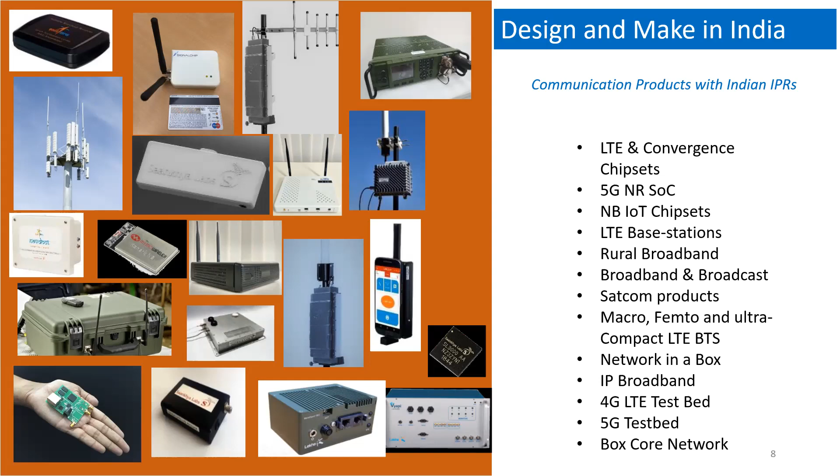These are the Indian IPRs that have already been done in India, like LTE convergence chipset, 5G NR SoC, then NB-IoT chipsets, LTE base stations, rural broadband, broadband and broadcast, SATCOM products, macro femto and ultra compact LTE BTS, network in a box, IP broadband. Our point is whether it is built in Bhubaneswar or in tier 2 cities, and how we are connecting with it.

Because we don't want to discuss in detail, our objective today is to showcase the Fablab, and if some of the IoT startups and other startups can showcase their products, then we can showcase their products to all the telecom service providers and internet service providers, and they can scale up their business or project depending on their use cases.

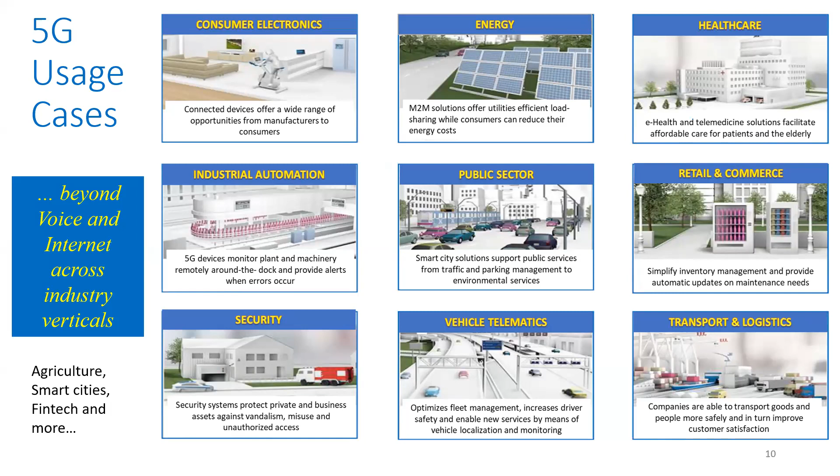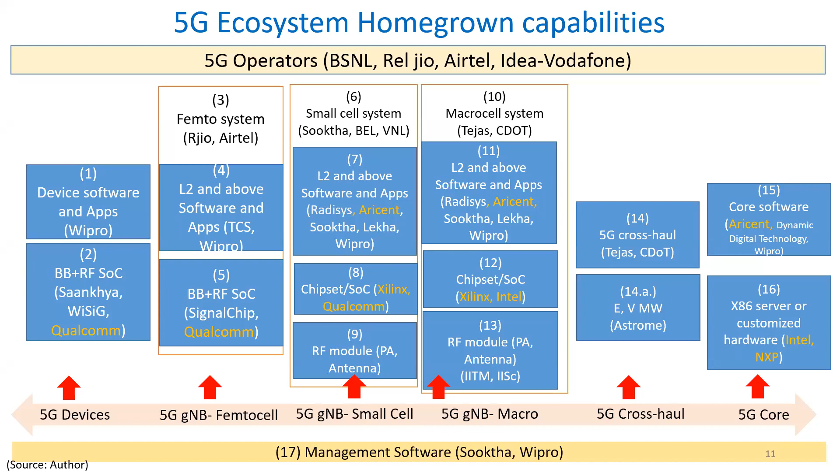So all these use cases will soon be realized. I think a lot of companies have already successfully done this, and some trials have already started. Reliance Jio and Airtel have started the trial.

As you know, DOT has sponsored a 5G testbed, developed by the consortium of Indian Institute of Science Bangalore, IIT Madras, IIT Delhi, IIT Kanpur, IIT Hyderabad, CEWiT Center of Excellence, SAMEER Center of Excellence. The objective is to provide an end-to-end public access 5G testbed comprising RAN, UE nodes, core network, support and enhancement. It was supposed to be ready by mid 2021, and we are already in mid 2021.

So I think now we should be prepared with 5G test products that can be used in 5G testbeds. This is an example of the 5G testbed the Honorable Prime Minister has visited. His objective is that we should be Atmanirbhar, at least in this technology that is coming. So our objective is, can we do something about it?

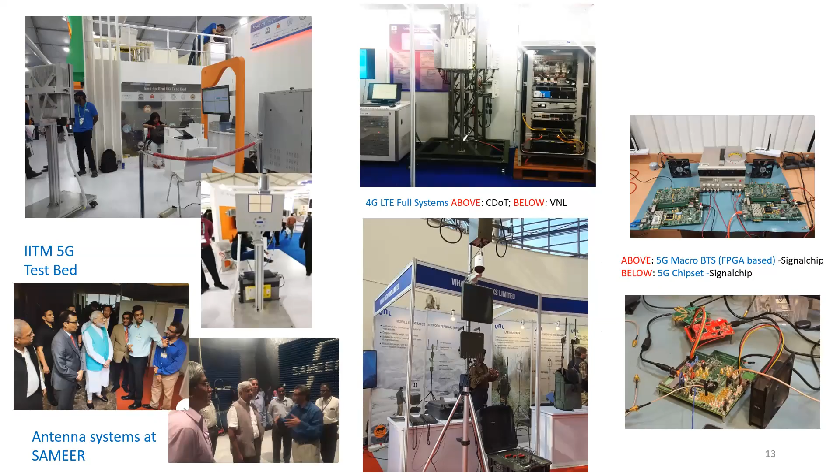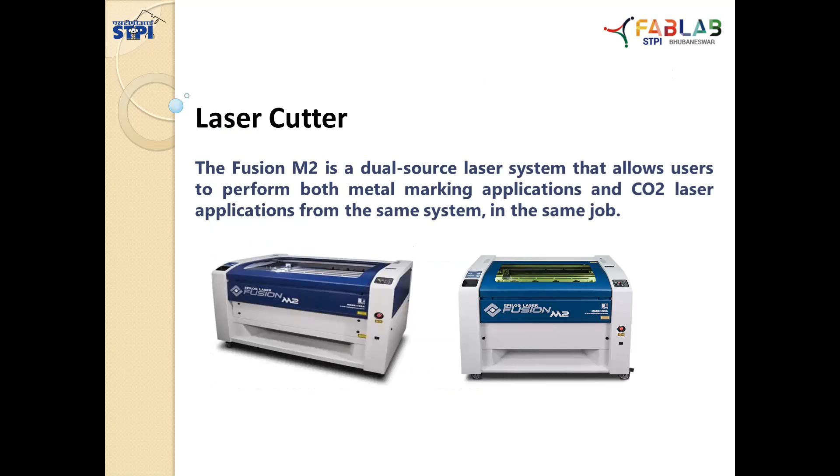This is the... sorry, any question? Please continue. Okay, thank you.

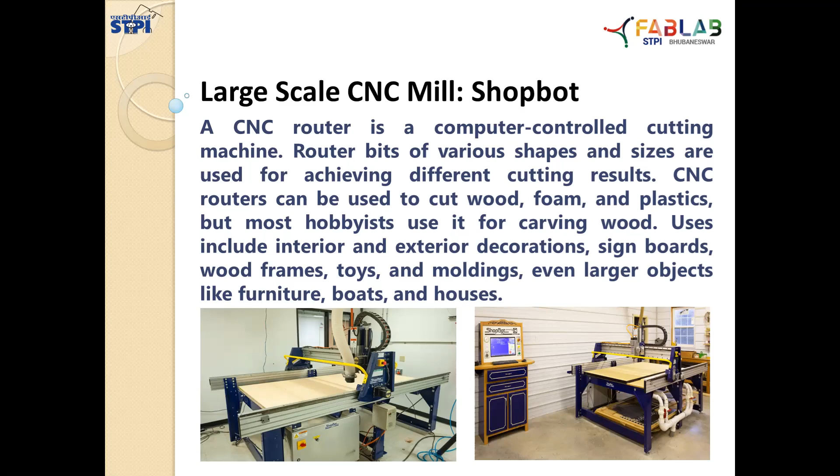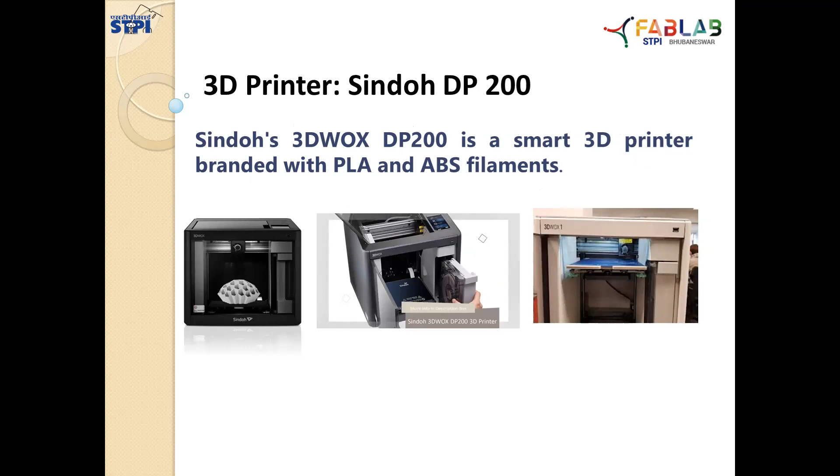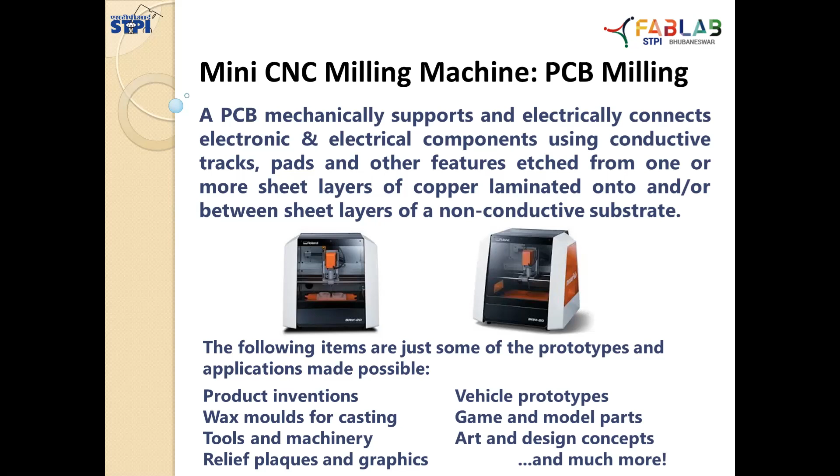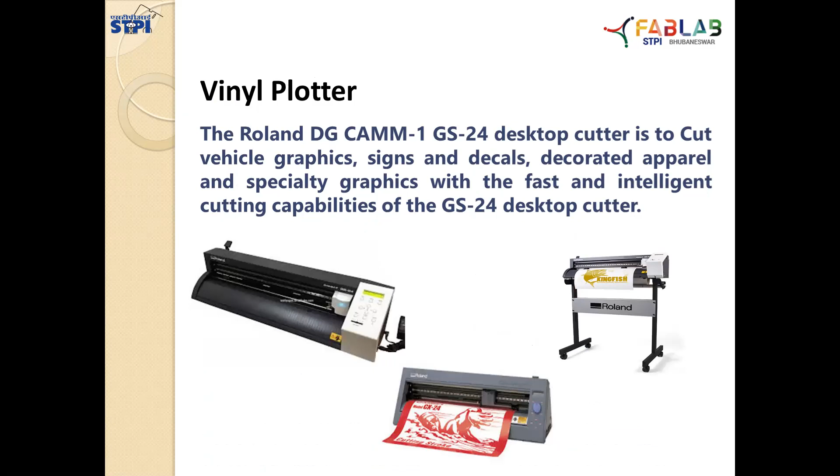This is a vinyl plotter. You must have heard about stickering of vehicles or any kind of stickering work. This can also be done through this vinyl plotter. All the equipment available in our Fab Lab is 3-dimensional. Any kind of complex stickering can also be done on this vinyl plotter. Roland DG CAMM.

This is another interesting 3D printer, an ultraviolet based 3D printer, resin based stereolithography. The peculiar part is this resin liquid gets cured, and it designs as per our requirement. After completion of the printing, we need to have a chemical wash for completion and to remove the supports. Very interesting equipment. These are basically used for those who are into dentistry particularly, for small prototypes. This machine is widely popular among dentists.

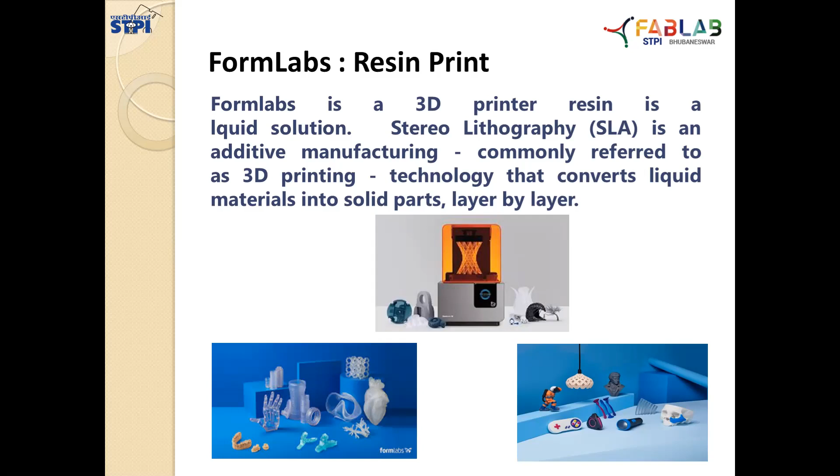This is another interesting 3D machine for molding and casting. There are two types of molding and casting. One is a particular artwork kind of thing we can design. In earlier days we used to see clay idols, like the murti of Lord Ganesh or Goddess Durga, where there is a frame, we put the clay, and the model shape comes out. But this is a three-dimensional advanced technology. You can do any kind of molding and casting by pouring liquid. You can see in the picture, first the shape is designed and cut, then you need to pour the liquid, and after that it comes to the final product.

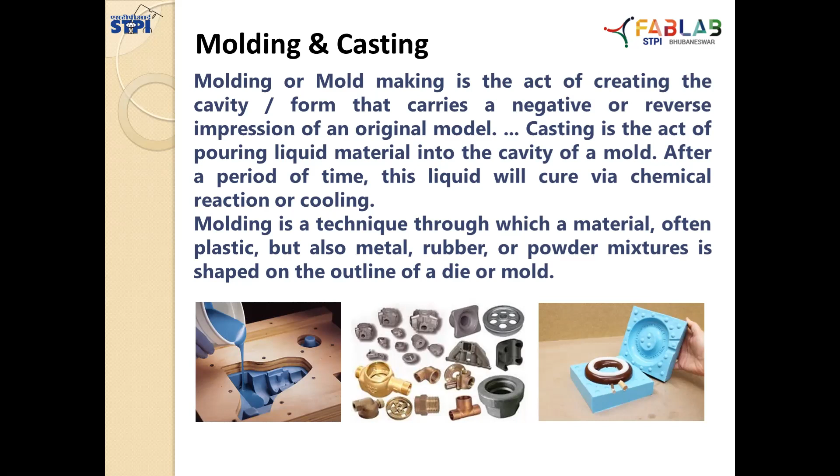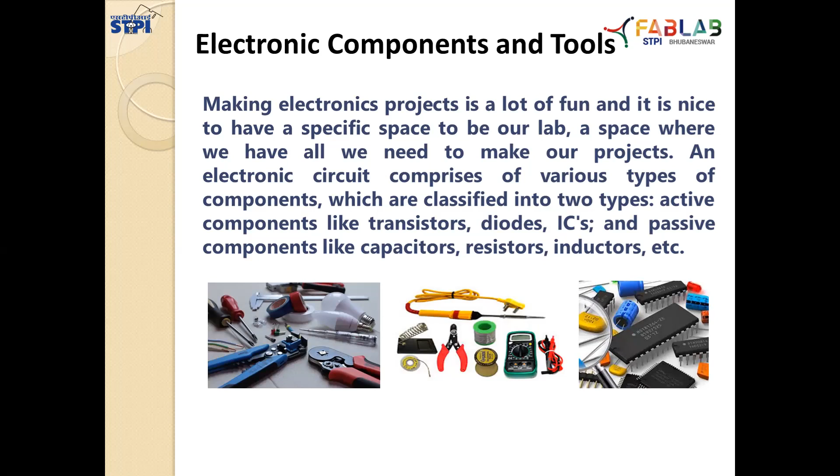These are electronic components and tools like transistors, diodes, ICs, passive components like capacitors, resistors, etc. All are available in our lab. Also test equipment like function generators, oscilloscopes, multimeters are all available, including consumables, electronic components, small components, everything.

It's a one-stop solution with the maker's culture for those who have the do-it-yourself concept.

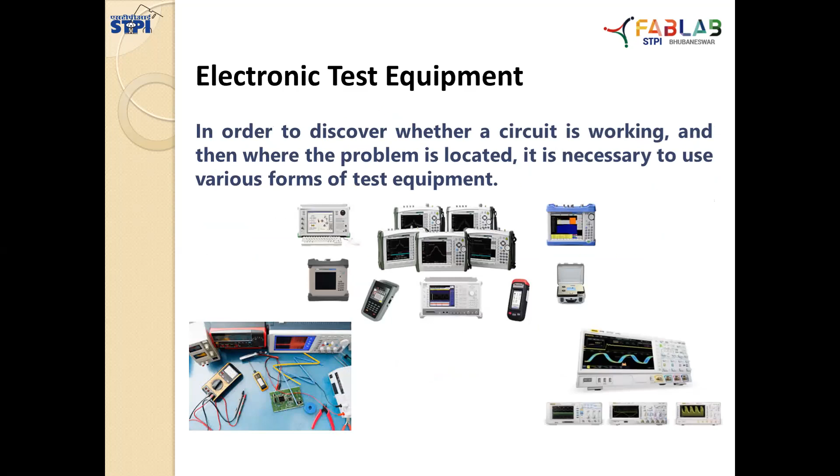Currently, we are also planning to start short-term and long-term skilling programs for various artists, startups, university students, ITI and college students, engineering students, and researchers. They can be benefited from this lab. We have stakeholders like IIT Bhubaneswar, Skill Odisha, and Polytechnic for knowledge and skill in digital fabrication, including professional students and technocrats of various segments.

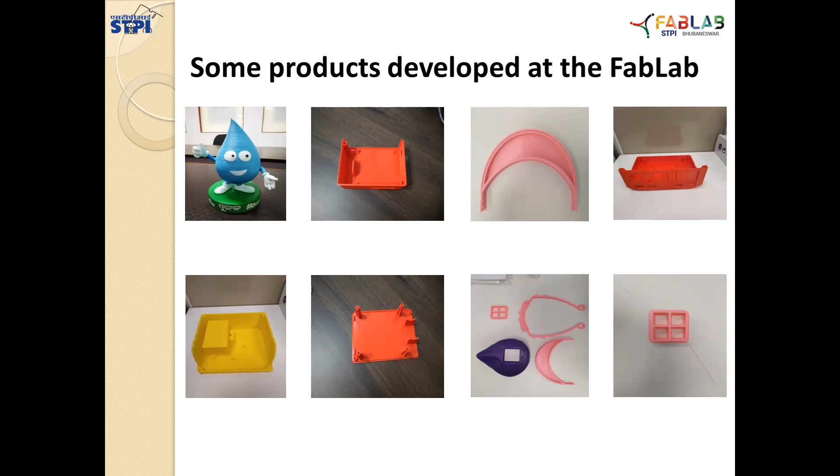These are some of the products developed in our Fablab continuously since 2019. This first image is Sujal, the mascot for Swachh, for 24/7 water supply to the citizens of Odisha. This is a project under Central Water Commission, and they developed their mascot in our lab. These are the face shields and other components and tools that have been developed through this 3D printer since then.

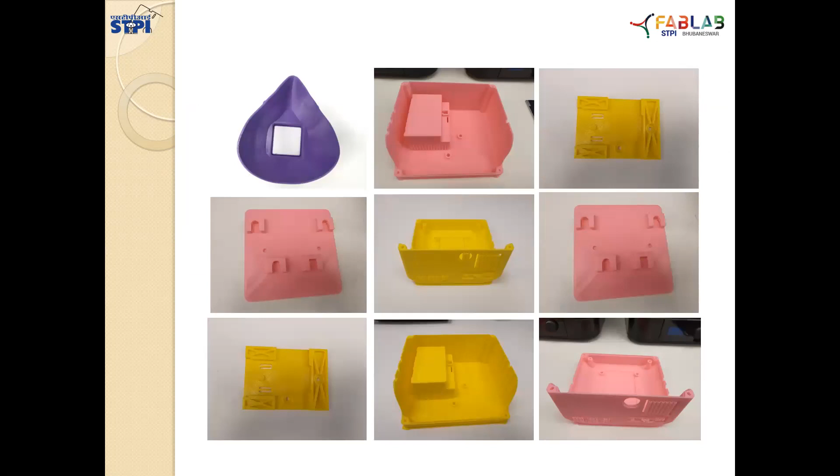It has been a meaningful association with many government and non-government organizations, startups, research scholars, and entrepreneurs for facilitating the development of prototypes and products of different kinds. Some of the associated organizations we have till now include IIT Bhubaneswar, SAC Robotics, one of the prominent startups into developing robots, and Phoenix Robotics, another good startup company founded by some NIT students.

Mr. Isham Panigrahi is the chief incubator as well as a new developer having new ideas. They are developing a solar-based vehicle, like the ones used in golf courses or hotels, so he is planning a dual facility having solar and battery power. And as I said, there was involvement with a state government agency for the mascot Sujal.